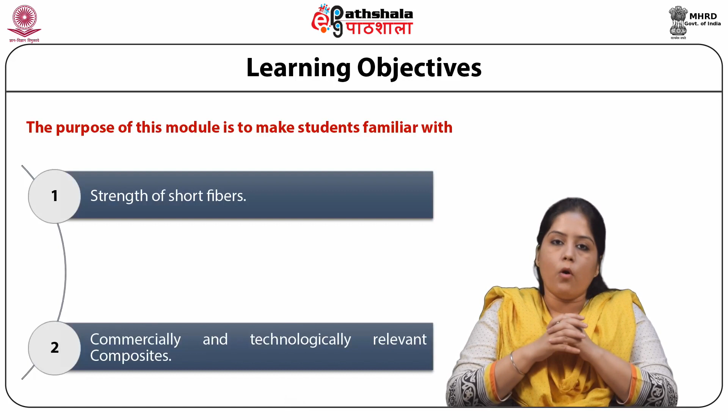Let us start with a basic introduction about the module. The commercial application of composite materials in large-scale production started in the early 1940s, before 1950s, during the period of the Second World War, with marine applications in the military. Today, composite materials are an integral part of many products, including aerospace, automotive and marine, consumer goods, sporting goods and infrastructure, and many more applications.

The recent developments in the area of polymer composite manufacturing technology have enhanced the use of composites in wider prospects. High volume production techniques such as sheet molding compounds have gained a higher maturity level and are routinely used in the automotive, consumer and many other industries on a large scale.

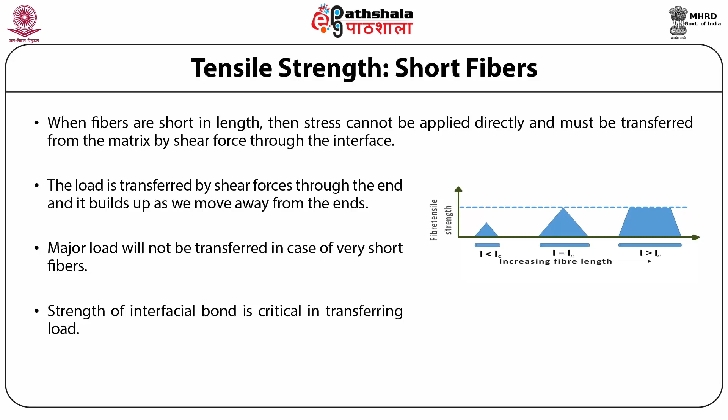Tensile strength of short fiber composites. As discussed earlier, load to the fibers is transferred through shear stress on the surface. These stresses build up from the edges and reach a maximum value at the fracture strength of the fibers. The length of the fibers must be long enough that the load can build up to its full capacity. This is also explained schematically in this figure, which illustrates the minimum length requirement for the fibers to carry full load in the composite.

Continuing our discussion on the tensile strength of short fiber composites, the average stress in a fiber can be given by sigma F bar equals sigma F multiplied by (1 minus LC by 2L), where sigma F is the fracture strength of the fiber and LC is the critical length of the fiber.

The composite strength based on this average stress can be given by sigma C equals sigma F VF multiplied by (1 minus LC by 2L) plus sigma M prime multiplied by (1 minus VF).

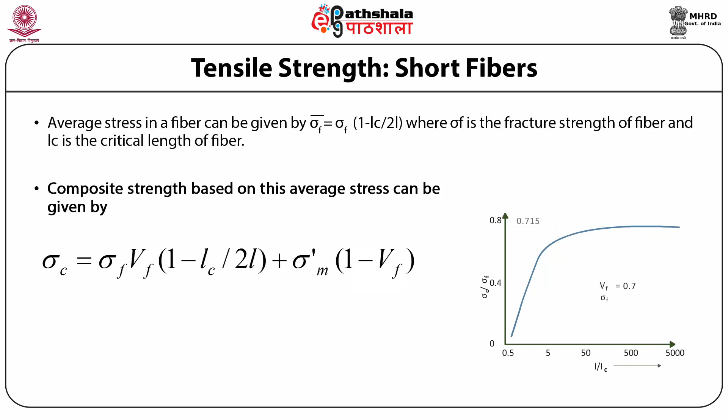Now, the figure shown here represents the variation of the efficiency of strengthening, that is sigma C divided by sigma F, with the change in average length of fibers. It is obvious from the plot that 95% of the strength of continuous fiber composite can be achieved in short fiber composites with fibers only 10 times as long as the critical length.

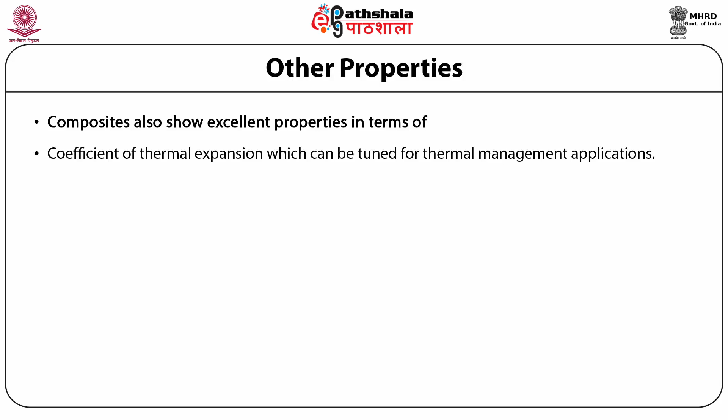Now let us discuss the various other properties of composites. Composites show excellent properties in terms of, first, coefficient of thermal expansion, which can be tuned for thermal management applications; second, stiffness, which also results in high resistance to mechanical and thermal distortions; third, excellent wear resistance; fourth, vibration damping; fifth, energy absorption.

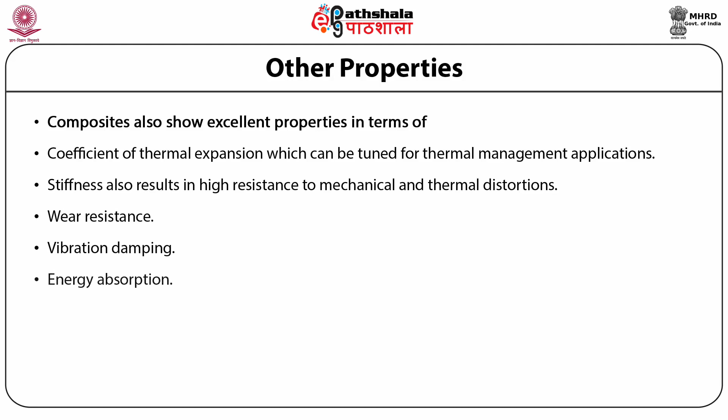Sixth, they have the advantage of self-cleaning or self-lubricating properties. They also have high thermal conductivity and high temperature strength.

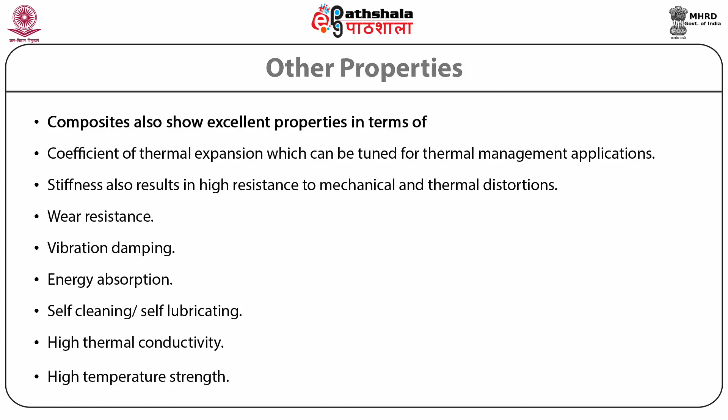So students, till now we have discussed the tensile strength for various composites. Now let us discuss those composites which are commercially relevant. So we will be discussing the commercially relevant composites.

Cermet is a composite containing a metal matrix and ceramic reinforcement. There are two main classes of cermets, and these are cemented carbides and oxide based cermets.

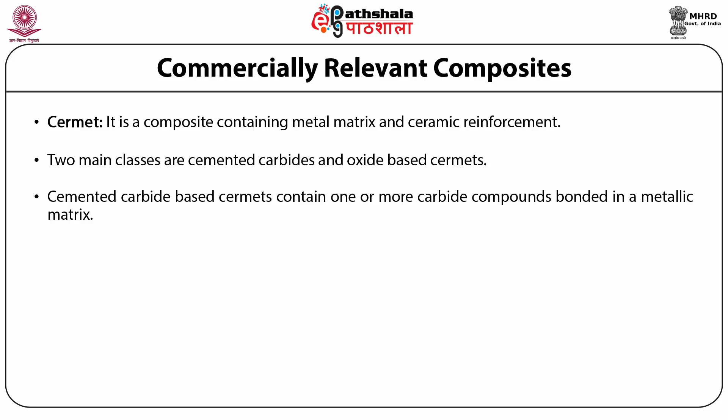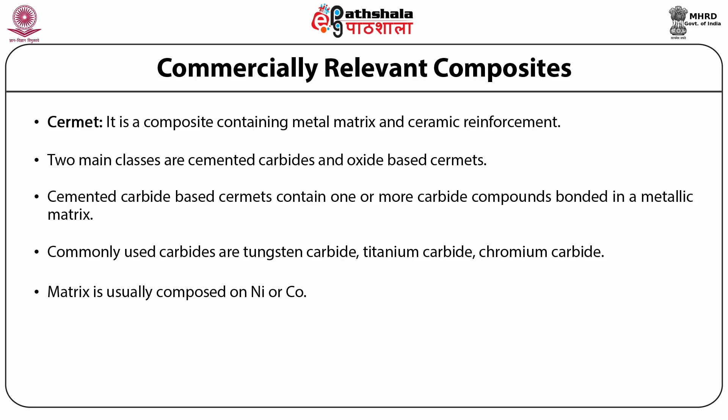Cemented carbide-based cermets contain one or more carbide compounds bonded in a metallic matrix. The commonly used carbides are tungsten carbide, titanium carbide, and chromium carbide, and the matrix is usually composed of nickel or cobalt. These are commercially relevant composites.

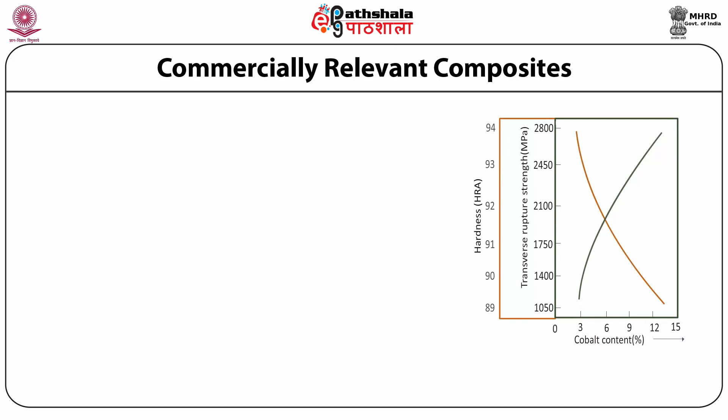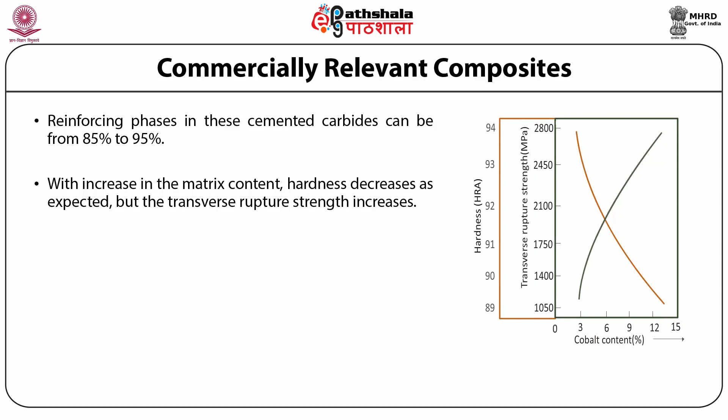The reinforcement phases in these cemented carbides range from 85% to 95%. Increase in the matrix content leads to a decrease in hardness as expected, but it also improves transverse rupture strength. Hence, an optimized ratio has to be found based on the specific application.

The variation in hardness and rupture strength with the change in bonding phase of cobalt is shown in this figure. As we can see, the hardness values are very high, and hence the major applications for such composites are in cutting tools, dies, and indenters.

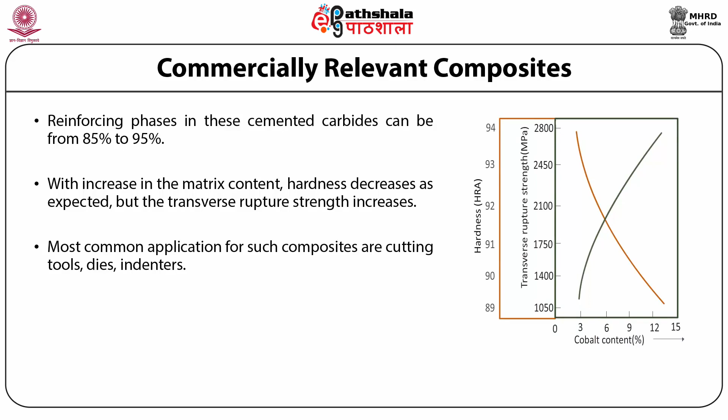Now let us discuss some of the commercially relevant composites. We have oxide-based cermets, such as alumina (Al2O3) particulates, which are used as the reinforcing phase in such alloys. MgO particulates are also used. The matrix is usually composed of chromium. Applications include cutting tools, mechanical seals, and thermocouple shields.

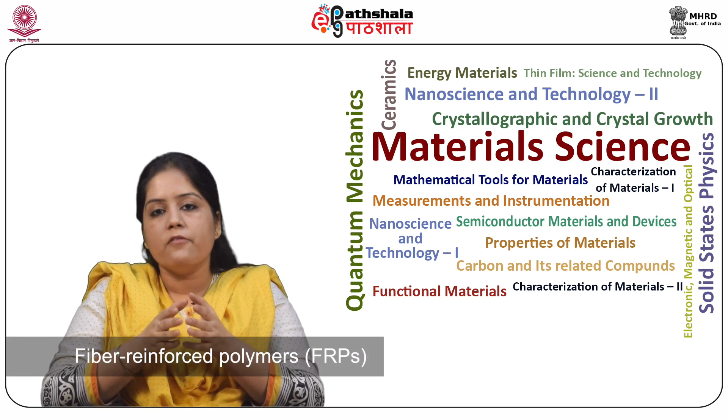Fiber reinforced polymers, or FRPs, are another technically relevant composite made of a polymer matrix embedded with high-strength fibers. A thermosetting polymer is usually used as the matrix. The fibers are usually made of glass, carbon, or Kevlar, depending on the strength required and the economics. Other commonly available fibers are boron, silicon carbide, alumina, and steel.

In some FRPs, that is, fiber reinforced polymers, there is more than one kind of fiber used. FRPs are mainly known for their high specific strength and high specific modulus.

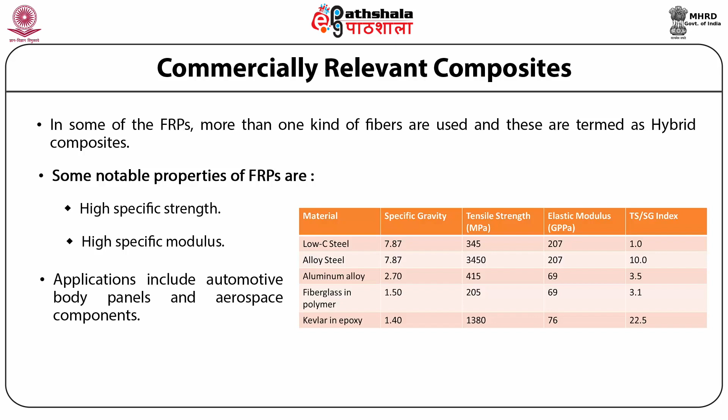Because of their high specific strength and specific modulus, fiber reinforced polymers are common in a wide range of applications, ranging from panels for some equipment to panels for automotive bodies and aerospace equipment. Till now, we have discussed the commercially relevant composites.

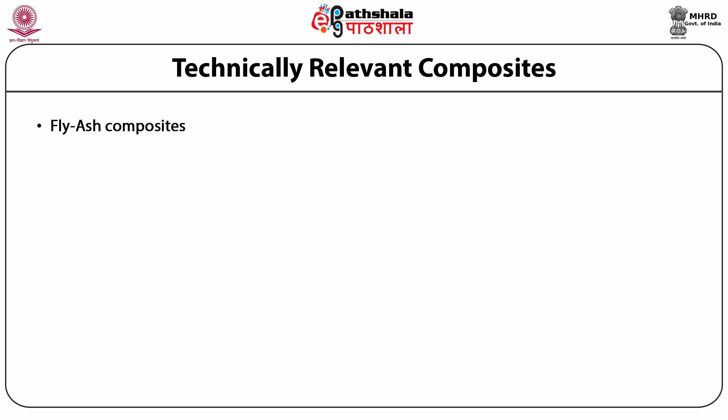Now let us focus on technically relevant composites, and the kind of composite we are going to discuss is the fly ash composite. Fly ash composites have not been commercially exploited, but they are technologically very relevant composites.

Metal matrix composites with hollow sphere-like structures have low densities and can absorb a lot of energy, acting as energy dampeners. Fly ash is an ideal dispersoid for this purpose, as it is very inexpensive. Fly ash is actually a waste product from thermal power plants and has very low density.

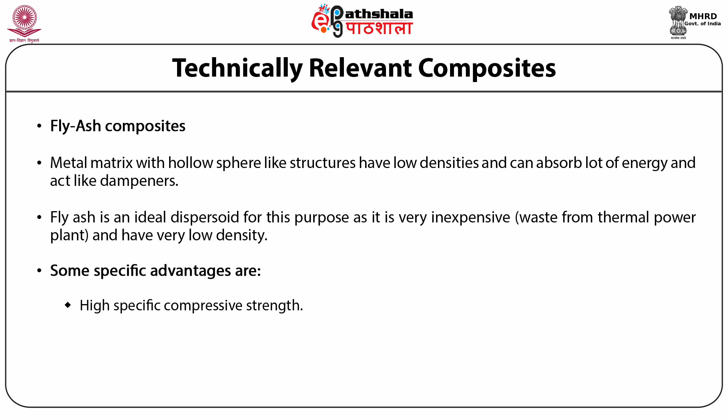There are various advantages of fly ash composites. Some specific advantages are: they have high specific compressive strength; they have low thermal expansion and hence good dimensional stability; and they have good damping characteristics.

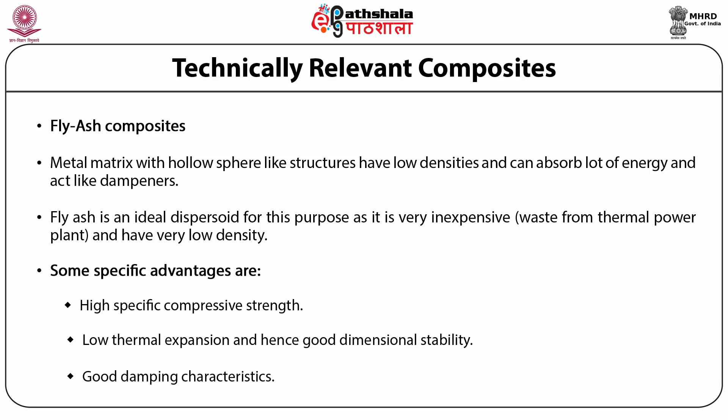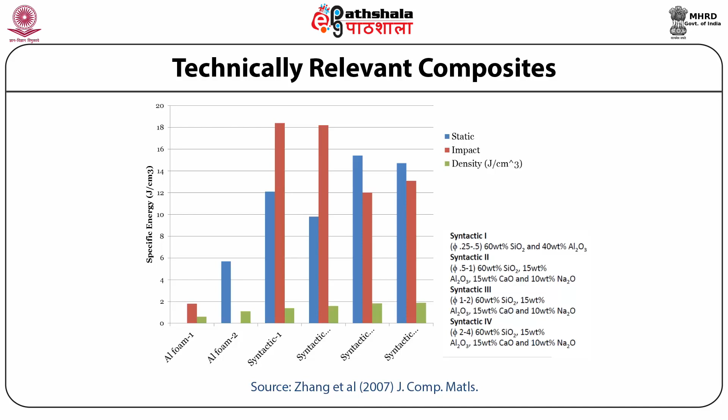Let us summarize what we have learnt in this module. The minimum length required for fibers to carry the full load in the composite, along with the variation in efficiency of strengthening with average fiber length, was discussed. We also discussed commercially relevant composites like cermets and fiber reinforced polymers, as well as technically relevant composites, that is, fly ash composites. Thank you.